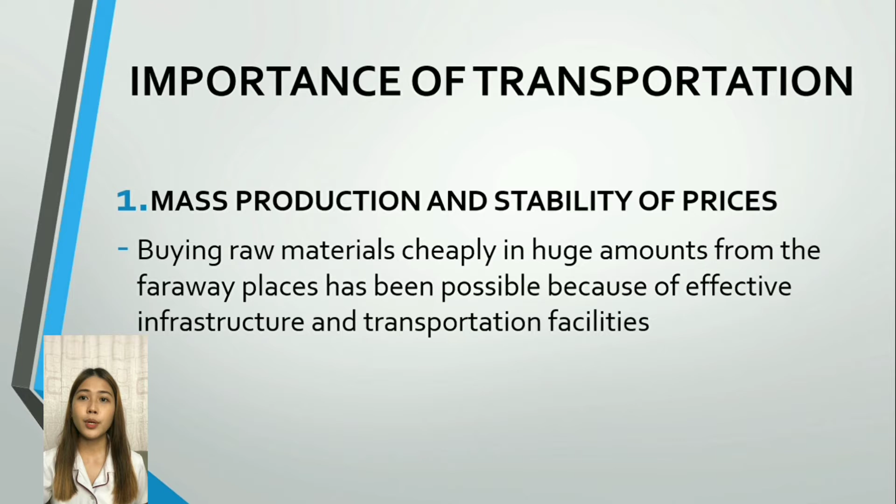Transportation has now brought about uniformity in price ranges by equalizing and stabilizing it throughout the nation. This move has been a blessing in disguise because it has encouraged healthy competition and discouraged the policy of monopoly of goods. Number two is the economic development.

Trade is no longer restricted within certain boundaries but has spread far and wide within every nook and corner of the world. It is the advancement of transportation that has acted as a binding force to link the world market. The importance of transportation is that it has become a major force in boosting the mobility of capital and labor. Now, it is possible for laborers to migrate to places where the job, facilities, and opportunities to earn are greater than local places.

Economic development has been possible because efficient transportation infrastructure has been able to minimize the exploitation of the labor class and maximize the optimization of national resources. It is now possible for a region to concentrate on production of goods that it is best suited for and distribute them to places where the demand is more.

Also, the importance of transportation is that it has become a crucial element of economic growth as it can transport resources easily, enabling societies to prosper and grow at a good rate. There is now better accessibility to invest for new as well as existing business entities. It is easy to see the emergence of markets, schools, colleges, and other facilities that have been a sign of increase of economic growth in a place.

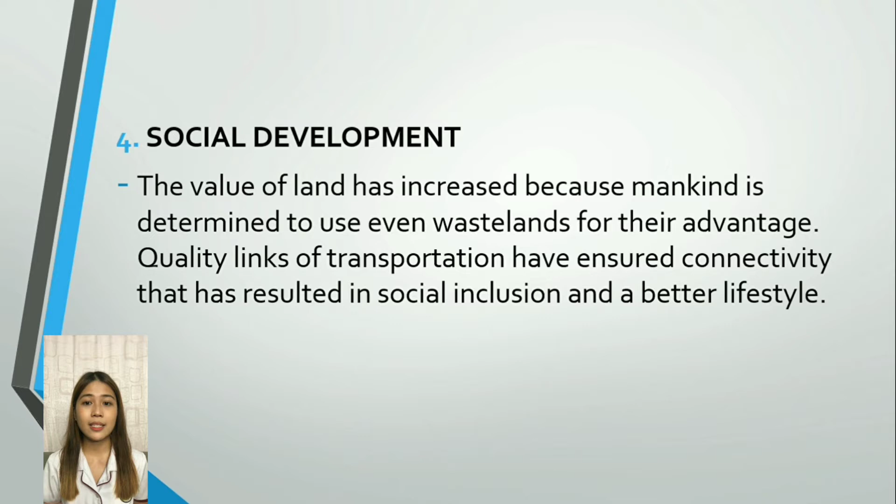And number 5, we have industrial and agricultural development. In this area, it has been possible to use good fertilizers, quality seeds, and numerous modern equipment and technologies because they could be transported from one place to another at reasonable cost. Similarly, it is transportation that helped the industries in acquiring the necessary raw materials as well as equipment and labor that is a must in industrial development.

Remember, encouraging trade, industry, commerce, and agriculture is one of the simplest and most economical ways of boosting the national wealth of the country.

Also, this is a help during national calamities. The transportation is very important during these times. Floods, drought, earthquakes, and famine are natural disasters that are unpredictable by nature. It is next to impossible to make predictions about their arrival, length, or severity. One can just wait for the time it loses its fury and dies a natural death.

So the worst thing about such disasters is that they can leave behind immense destruction that is immeasurable. Lost lives, resources, and infrastructures are common after effects that people have to deal with. In such dire circumstances, it is transportation that acts as a blessing in disguise and manages to distribute survival kits and emergency food items immediately afterward.

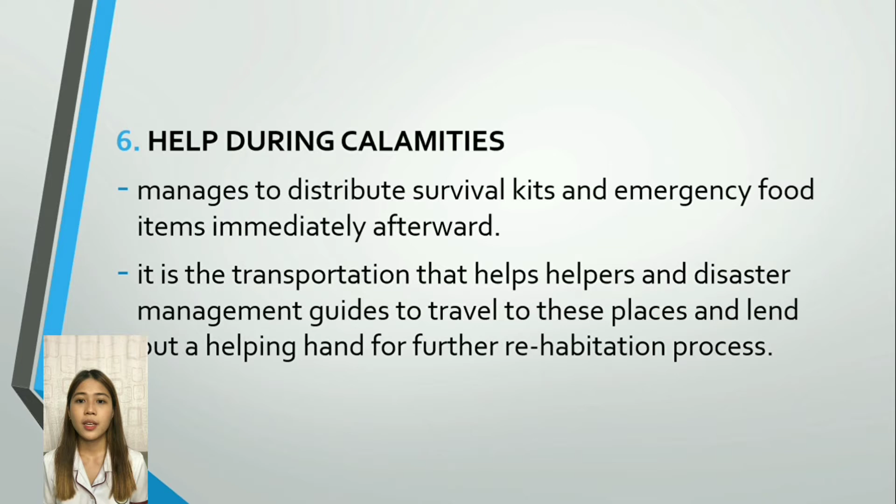And lastly, we have growth in business. So, transportation is considered a major force that has contributed heavily to the growth of business organizations. It is a medium that physically connects a business entity to its customers as well as suppliers.

The importance of transportation in business is undoubtedly immense, from bringing raw materials from source stations to manufacturing facilities and later distributing the finished goods from the locations to the consumer markets via warehouses. It is an essential service that would not have been possible without transportation. So it is transportation that ensures the availability of goods and services to the consumer.

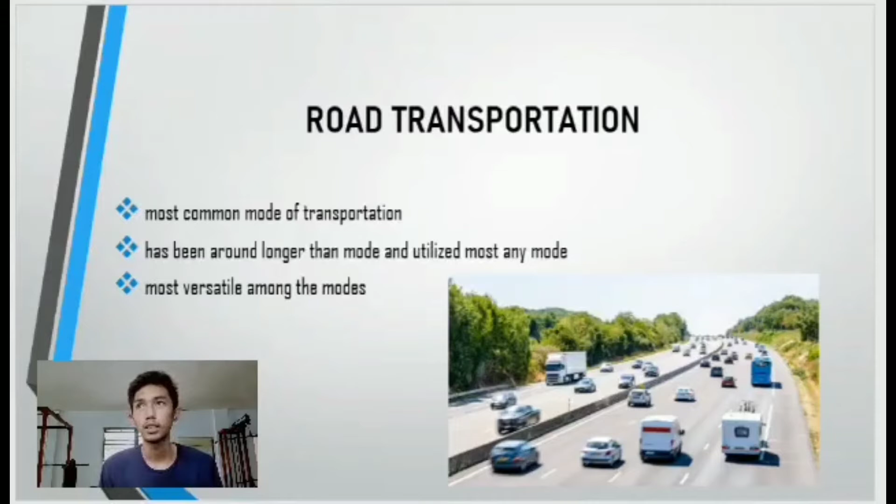Hi classmates, my name is Lian Doctor and my topic is about different modes of transportation. First is road transportation. It is the most common mode of transportation and has been around longer. It is also the most versatile among the modes. There are two types of road transportation, which are less than truckload or LTL and truckload TL.

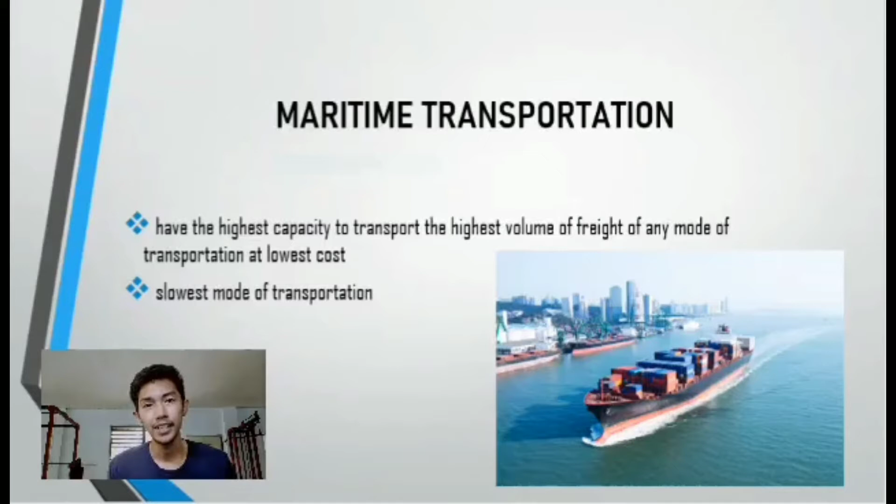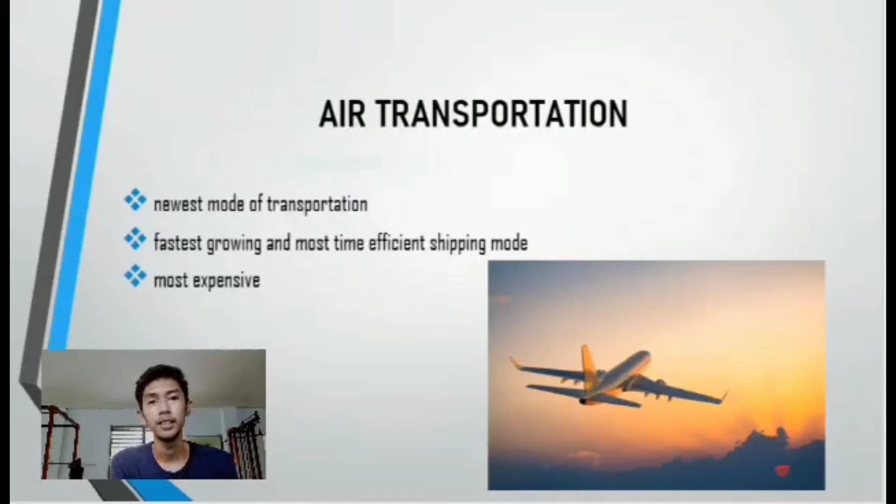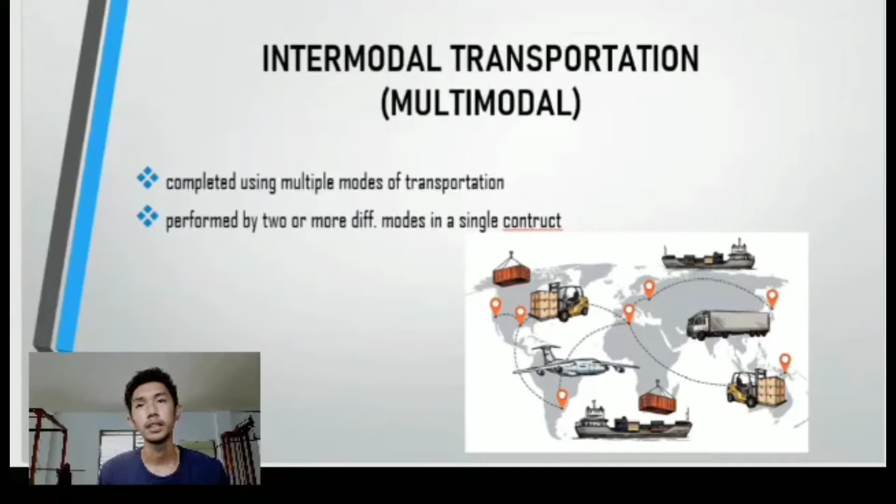And last is the pipeline transportation. It can be built above the ground or underwater.

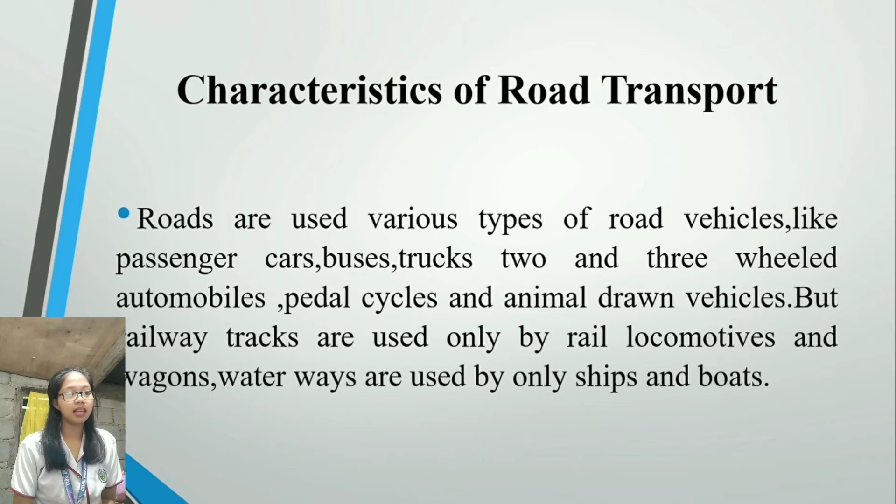Road transport requires a relatively small investment from the government. Motor vehicles are much cheaper than carriers like rail locomotives and wagons, water and air carriers. Construction and maintenance of roads is also cheaper than of railway tracks, docks,

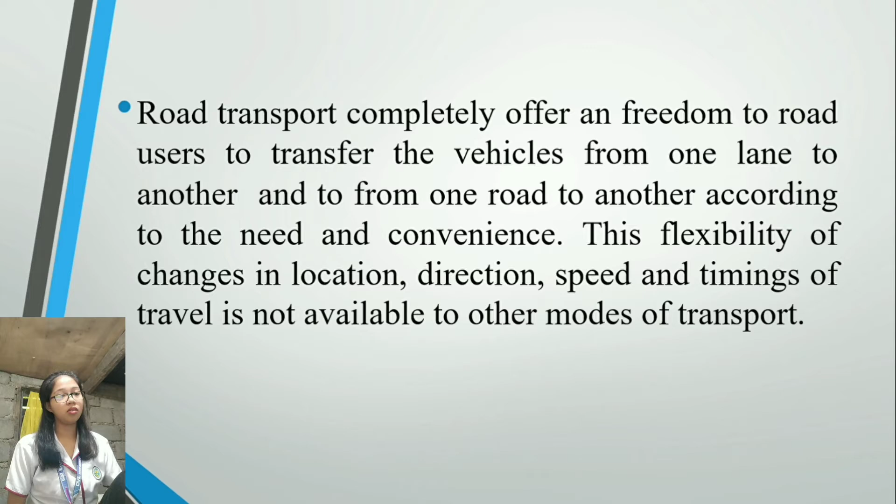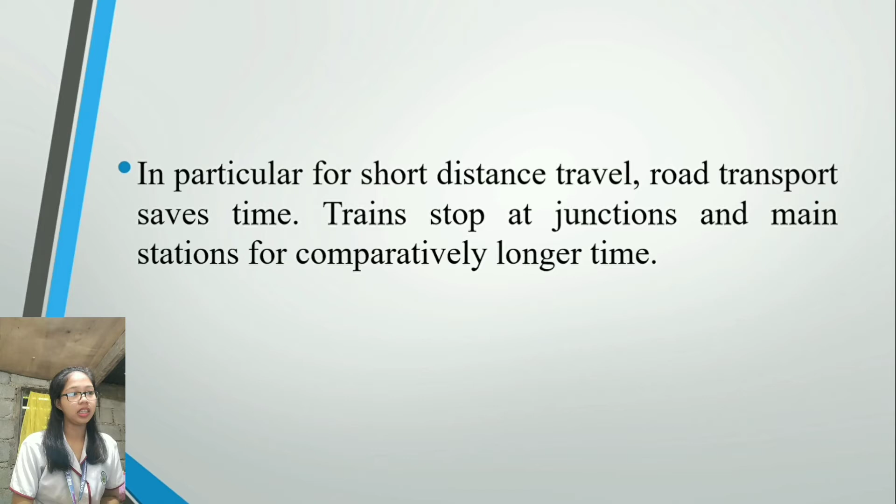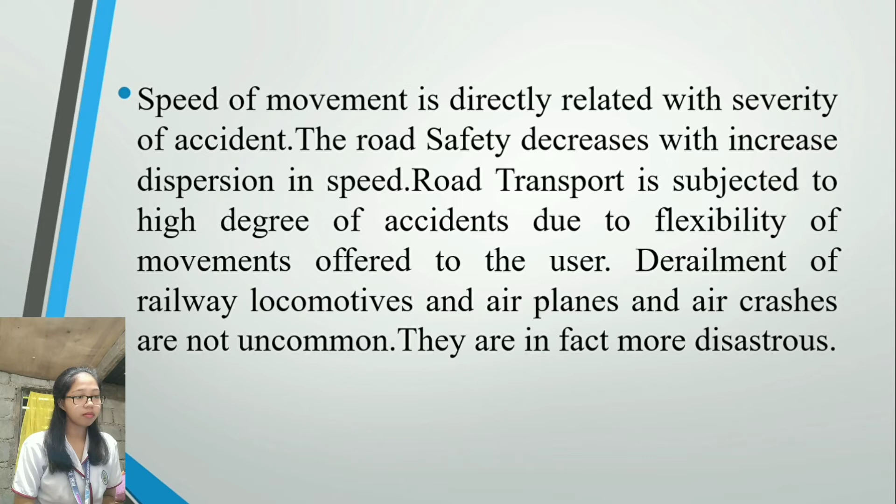Speed of movement is directly related with severity of accident. The road safety decreases with increased dispersion in speed. Road transport is subjected to high degree of accident due to flexibility of movements offered to the user. Derailment of railways, locomotive, and airplane and air crashes are not uncommon. They are in fact more disastrous. Road transport is the only means of transport that offers itself to the whole community.

Hi everyone, I am Syra Discaya, and I will be discussing to you the scope of traffic engineering. So let us first define what traffic engineering is. According to the Institute of Traffic Engineers, USA, traffic engineering is the phase of engineering that deals with planning and geometric design of streets, highways, abutting lands, and with traffic operations thereon, as their use is related to the safe, convenient, and economic transportation of persons and goods.

Professor Ress Blundeu of California University proposed a modified definition, that is, traffic engineering being the science of measuring traffic and travel, the study of the basic laws relating to the traffic flow and generation, and application of this knowledge to the professional practice of planning, designing, and operating traffic systems to achieve safe and efficient movement of persons and goods.

So generally, traffic engineering is the branch of engineering that deals with the improvement of traffic performance on road network and terminals through systematic traffic studies, scientific analysis, and engineering applications. It is the branch of civil engineering that deals with the application of scientific principles, tools, techniques, and findings for safe, rapid, convenient, economic movement of people and goods.

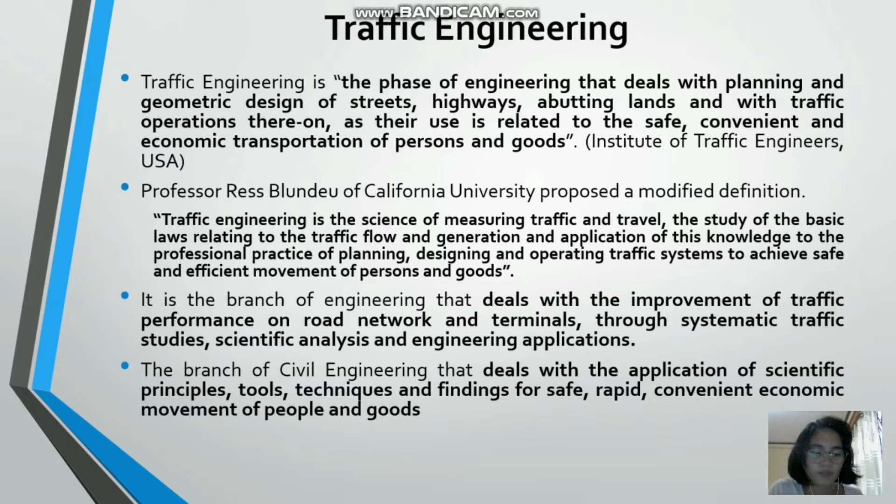So traffic engineering has 9 objectives. First is to achieve smooth and easy flow of traffic at intersections, develop the methods for improvements in general and solving specific problems in particular, having safe, convenient, comfortable, rapid, and economic transport of goods and persons, improve the speeds of vehicles, increase the traffic capacity of roads, make the streets safe for movements of both pedestrians and vehicles, reduce road accidents to minimum, reduce the delays in road journeys, and remove the traffic congestions, etc.

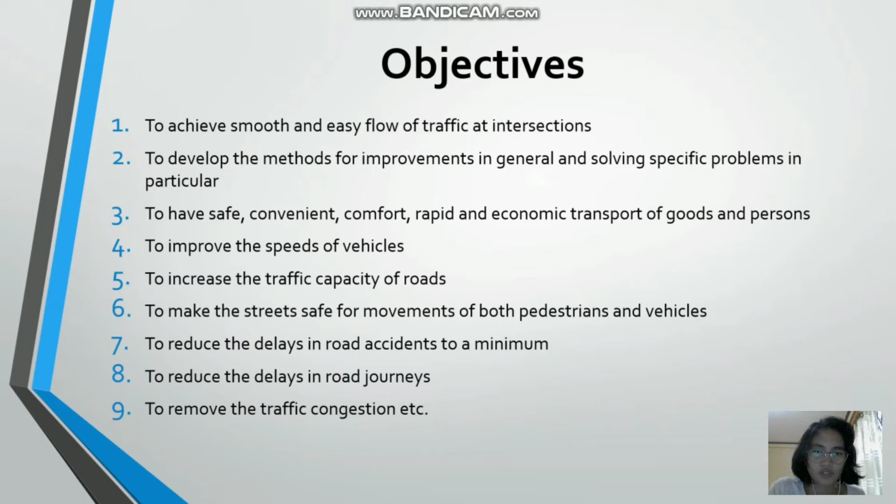So let us now come to the scope of traffic engineering. The factual studies of traffic operations will provide the foundation of developing methods and for solving specific problems. The study of traffic engineering includes the traffic characteristics, traffic studies and analysis, traffic operation control and regulation, planning and analysis, geometric design, and administration and management.

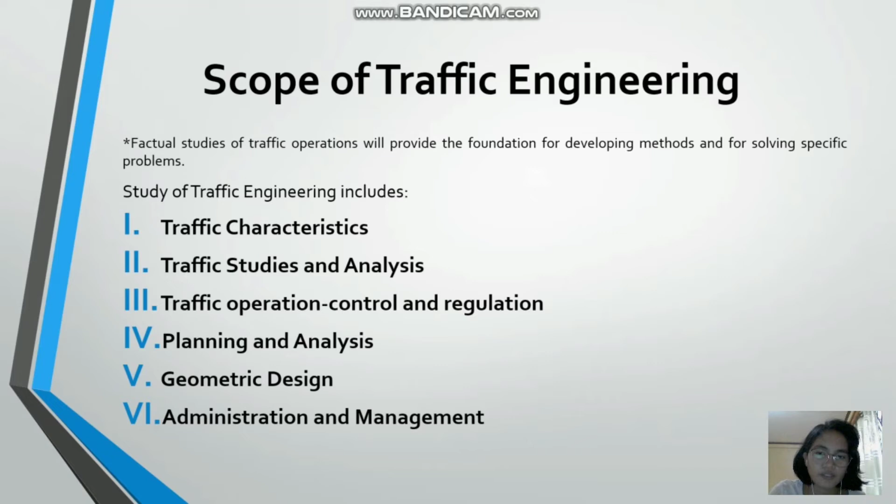So, traffic characteristics is basically the characteristics of the elements of traffic system. The traffic characteristics study is very vital for designing the required geometric features in the roadway. So there are 2 types of traffic characteristics. The road user characteristics, which includes the drivers, pedestrians, bicyclists, and passengers. So basically, it pertains to the person or the people that use the road. So there are 4 aspects of road user characteristics.

First is the physical, which is measurable and quantifiable. There are 2 types of physical characteristics, the permanent and the temporary. Permanent includes the vision, hearing, and reaction time of the road user. And the temporary is the presence of fatigue, influence of alcohol, illness, and drugs. Next is the mental characteristic. This includes the knowledge, skill, experience, intelligence, and literacy of the road user.

Next is the psychological, which includes the attentiveness, fear, anger, and superposition of the road user. Superposition is the desired speed and safety distance of the road user. And the last is the environmental characteristic, which includes the traffic stream, facilities, atmosphere, and locality.

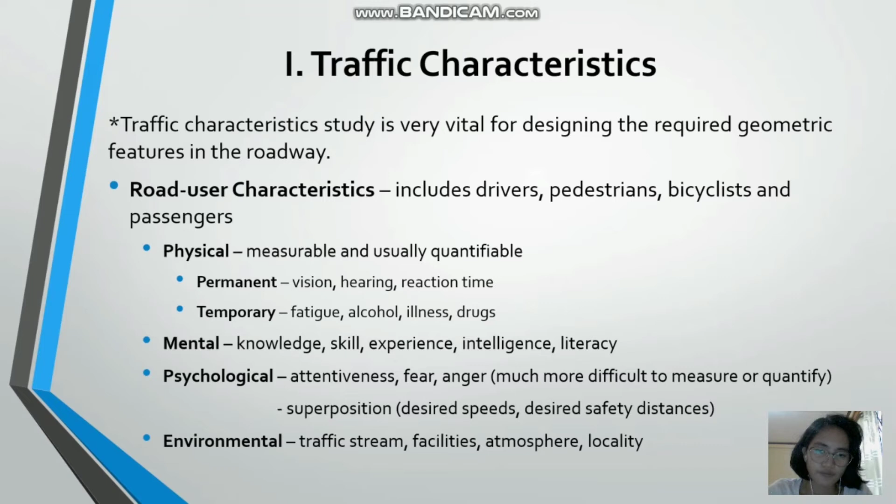The second type of traffic characteristic is the vehicular characteristic. So basically, vehicular characteristics pertain to the characteristics of the vehicle. These are the important characteristics of vehicles that affect the design and traffic performance. So there are 2 types of vehicular characteristics.

First is the static characteristics, which includes the dimensions of the vehicles, its length, width, height, wheelbase, departure and ramp angles, front, rear, and center clearances. This also includes its weight and maximum turning radius. Next is the dynamic characteristics, which is basically about the performance of the vehicle. This includes its speed, acceleration, power and braking system, and lighting system.

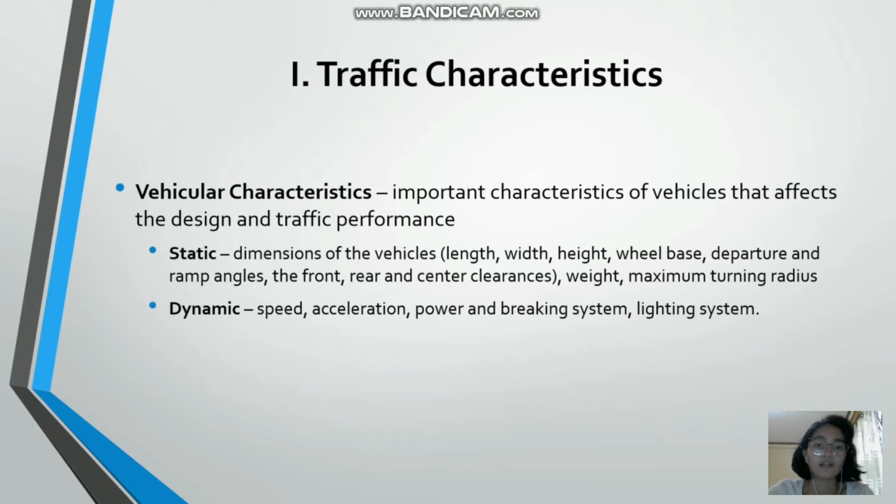The second scope is the traffic studies and analysis. These are also called traffic censuses or surveys. This involves the analysis of traffic characteristics for road designs, for safe and efficient movement of traffic, and traffic control. The studies include traffic volume study, speed studies, origin and destination study, traffic flow characteristics, traffic capacity study, parking

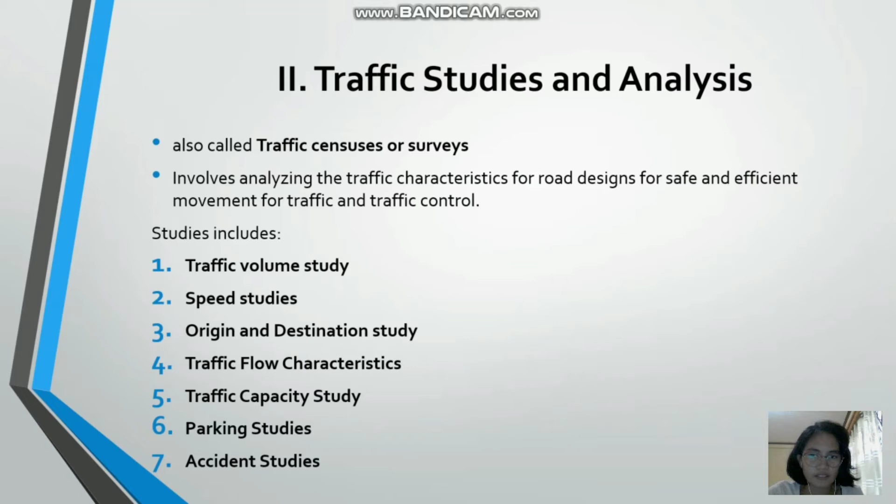studies, and accident study. Traffic volume study is the number of vehicles crossing a section of road per unit time at any selected area. These are used for road improvement and expansion, traffic operation and control, structural design of pavements, geometric design, planning and designing new facilities, etc. Traffic volume counting can be done through two methods: mechanical counting, which makes use of mechanical counters, and manual counting, which is through manual counts.

The second is the speed studies. This can be studied under the following heads: travel time, which is a simple measure of how well the road network is operating; spot speed, the instantaneous speed of a vehicle at a specified section or location; average speed, the average of the spot speeds of all passing vehicles at a given point on the highway; running speed, the average speed maintained by a vehicle over a particular stretch of road while the vehicle is in motion; and overall travel speed, the effective speed with which a vehicle traverses a particular route between two terminals.

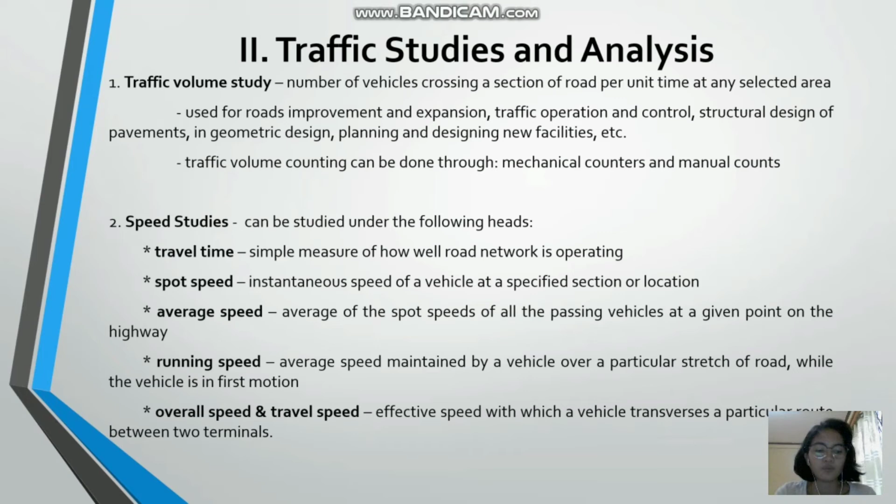Next is the origin and destination studies. These are used to plan the road network and other vehicular facilities for the traffic, and plan the schedule of different modes of transportation for the trip demands of commuters. Next is traffic flow characteristics, which includes both the transverse and longitudinal distribution of vehicles in the traffic stream and is useful in geometric design features such as traffic capacity, volume, number of lanes, and width of carriageways. Another is traffic capacity studies, the study of the ability of the road to accommodate traffic volume, expressed as the maximum number of vehicles in a lane or road that can pass in unit time.

Next is parking studies, which is useful in evaluating the facilities available for parking. And the last is accident studies, used to study the causes of accidents and suggest corrective treatment at potential locations, evaluating the existing and supporting the proposed design. Studies are carried out before and after improvement, making computations and giving economic justifications for the improvements suggested by traffic engineers.

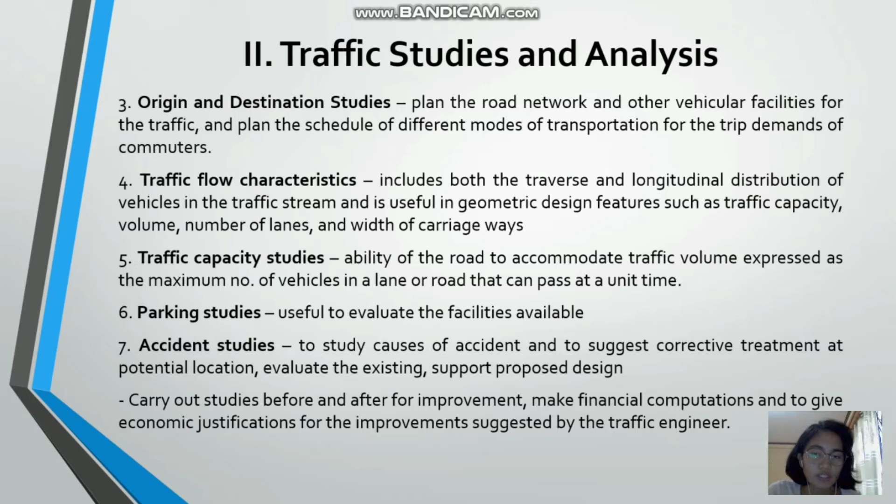The third scope is traffic operation, control, and regulation. This is done through the use of traffic controlling devices. These are arrangements or provisions made for road users so as to avoid accidents on the roads and for free and effective traffic flow.

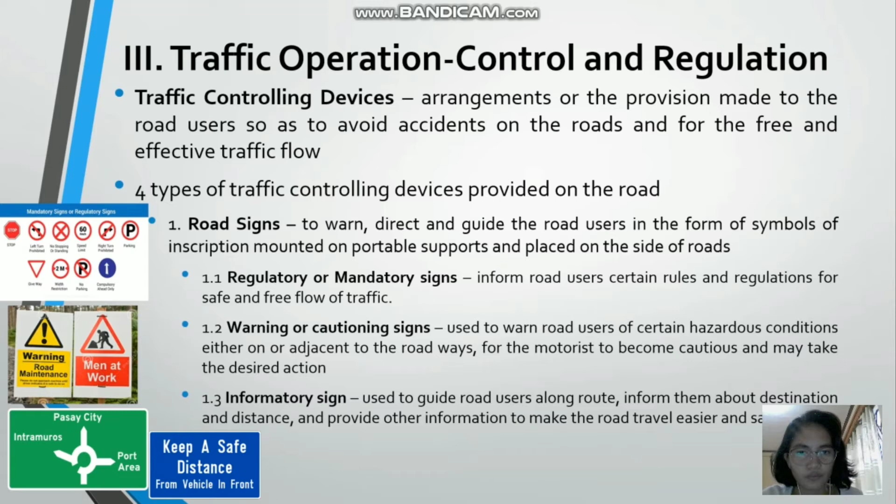Next type of traffic control devices is the markings. These are lines, patterns, words, symbols, or reflectors applied to the carriageway, curbs, sides of islands, or to fixed objects near the roadway. Ito yung mga yellow, orange, white, and minsan black lines, patterns, and words na nakikita natin sa road. Included din pala dito yung color green na lights na nandun mismo sa road. Yun yung tinatawag na reflectors. So those are the examples of markings.

This is used to warn, inform, and guide road users, and are made by using paints in contrast with colors and brightness on pavements or other backgrounds. Ordinary paints, like oil paints, are used for road markings.

The third type of traffic control device is the signals. These are control devices that could alternately direct the traffic to stop and proceed at intersections using red and green traffic light signals automatically. Ito yung mga traffic lights na nakikita natin.

There are two types of signals. One is the traffic control signals — ito yung traffic light mismo intended for the drivers. These have three colored light glows facing each direction of traffic flow. Red is for stop, green is for go, yellow or amber is for clearance time or preparation time.

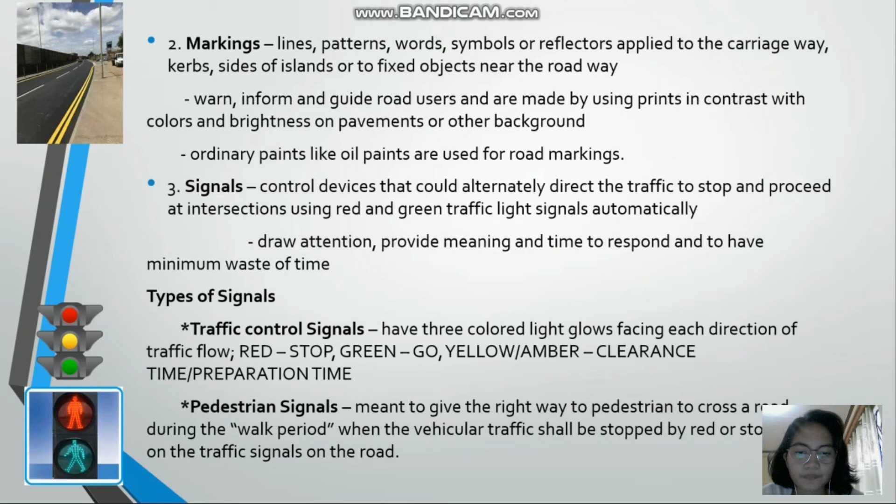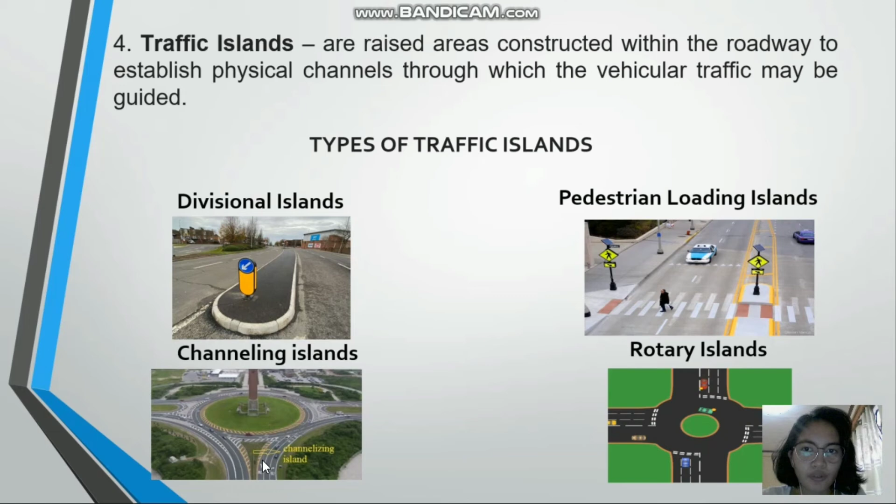Let us now come to the other scopes of traffic engineering. The fourth scope of traffic engineering is traffic planning and analysis — dito na papasok yung planning. This is done to prevent or lessen accidents and congestions.

The next is the geometric design, and dito na papasok yung designs. This refers to the dimensions and arrangements of the visible features of a roadway. This includes pavement widths, horizontal and vertical alignment, slopes, channelization, intersections, and other features that can significantly affect the operations, safety, and capacity of the road network.

And the last scope is the administration and management. Traffic management is the organization, arrangement, guidance, and control of both stationary and moving traffic, including pedestrians, bicyclists, and all types of vehicles. Its aim is to provide for safe, orderly, and efficient movement of persons and goods, and to protect and, where possible, enhance the quality of the local environment on and adjacent to traffic facilities. So those are the scopes of traffic engineering.

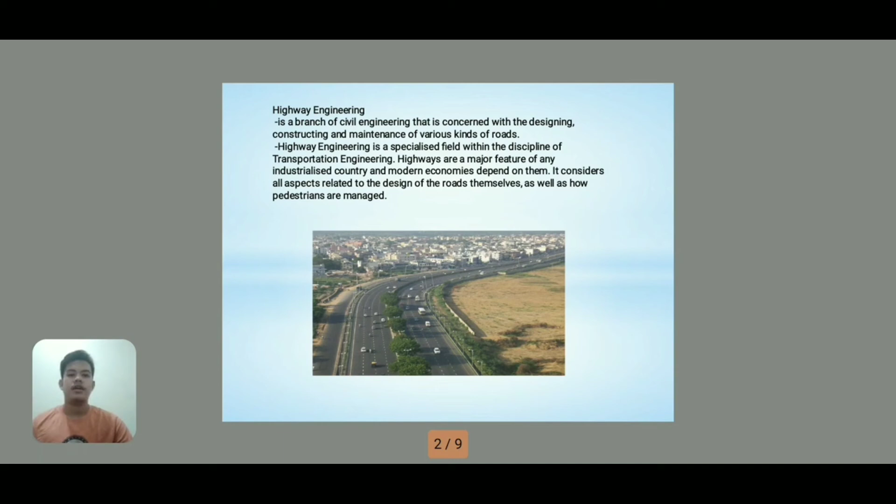It considers all aspects related to the design of the roads themselves, as well as how pedestrians are managed. Besides designing, constructing, and maintaining roads of different types, highway engineering is also concerned with the study of the planning, location, and development of roads.

A highway engineer needs to identify areas that require connectivity. He needs to come up with a plan to connect the remote areas in an efficient way. Developed roads need to be evaluated on a regular basis by such highway engineers.

For example, as you notice the Rompeolas Road, which is very effective because it helps with traffic control. As you can see, the jeepneys heading to east Sorsogon pass through here, so they avoid traffic compared to taking the main road of Sorsogon.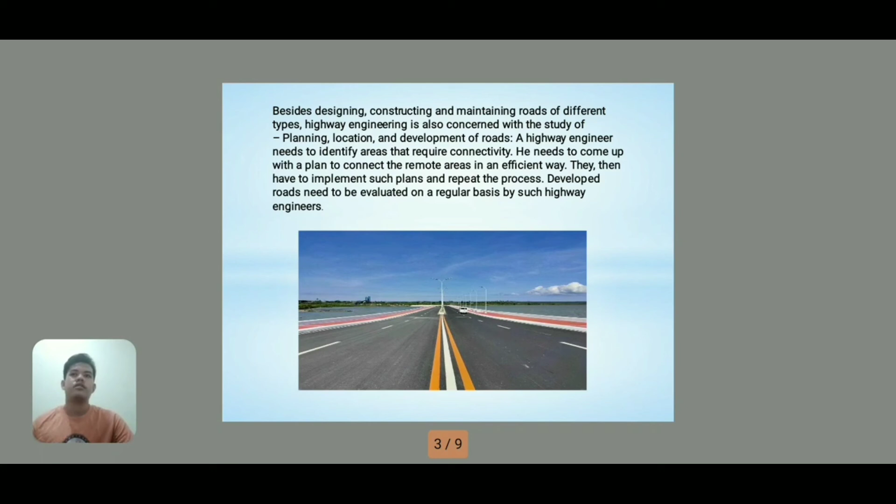So one of the scopes of highway engineering is the geometric design of a highway. It is the determination of layout and features visible on the highway, with emphasis on satisfying the needs of the driver as well as ensuring the safety of the vehicle.

It is about comfort while driving and efficiency. Other related factors are also considered based on the project. The main features considered for geometric design of a highway are the cross-section elements, the gradient, the intersection, and the consideration of sight distance, as you can see in that picture.

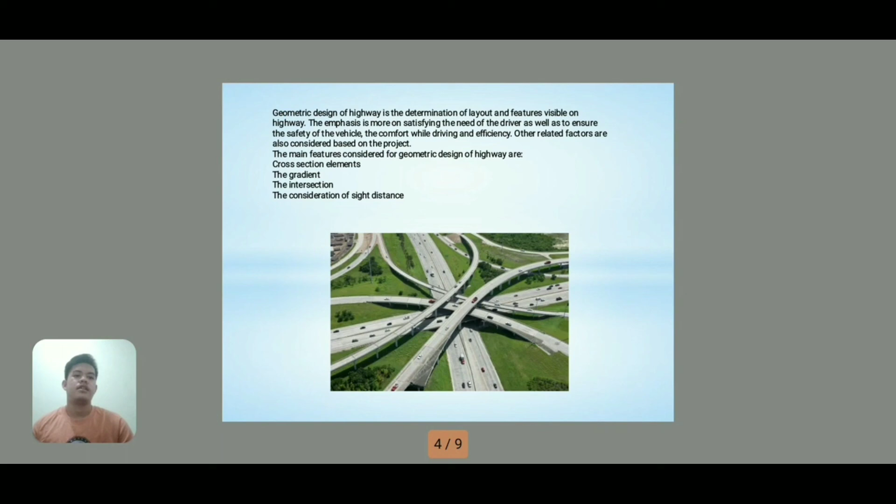Second is material availability. A highway engineer needs to ascertain the requirement of materials. Adequate materials is a must for the smooth and orderly conduct of construction activities. He also needs to avoid overstocking, as that simply increases the carrying cost.

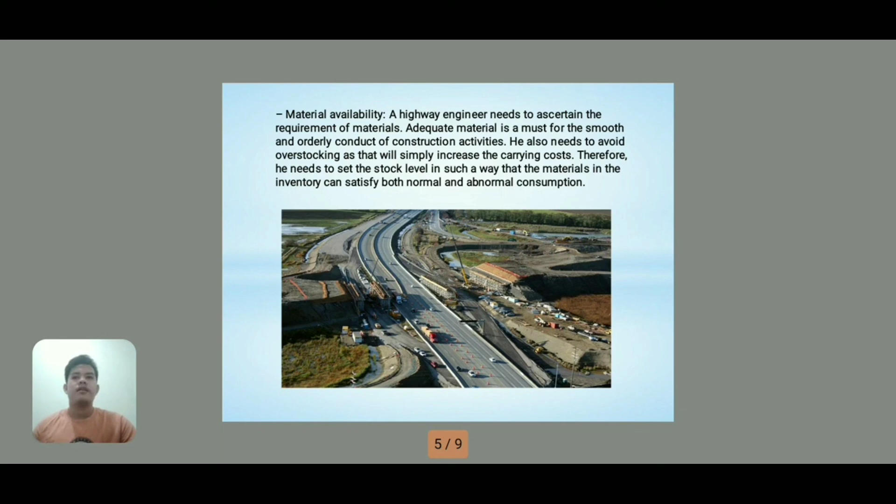So a highway engineer needs to ascertain the requirement of materials, to ensure material availability in order to avoid delays in the construction of roads.

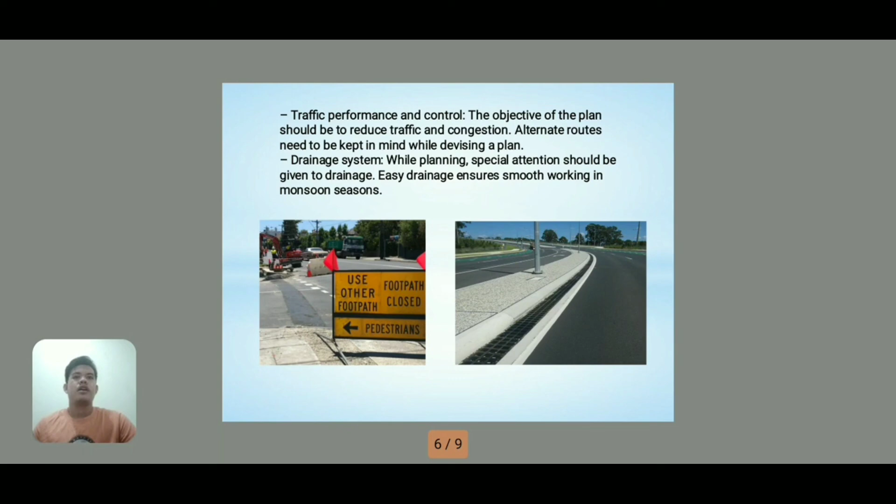The fourth is the drainage system. While planning, special attention should be given to drainage. Easy drainage ensures smooth working during monsoon seasons. Effective drainage systems for highways are very important during the rainy season.

Next is road alignment. The position of the center line on the highway on the ground is called the highway alignment. As you can see in the picture, the projection of a highway alignment in the horizontal plane is termed the horizontal alignment, and the projection in the vertical plane is called the vertical alignment. Alignment must be selected in such a way that the overall cost during construction, operation, and maintenance is minimum.

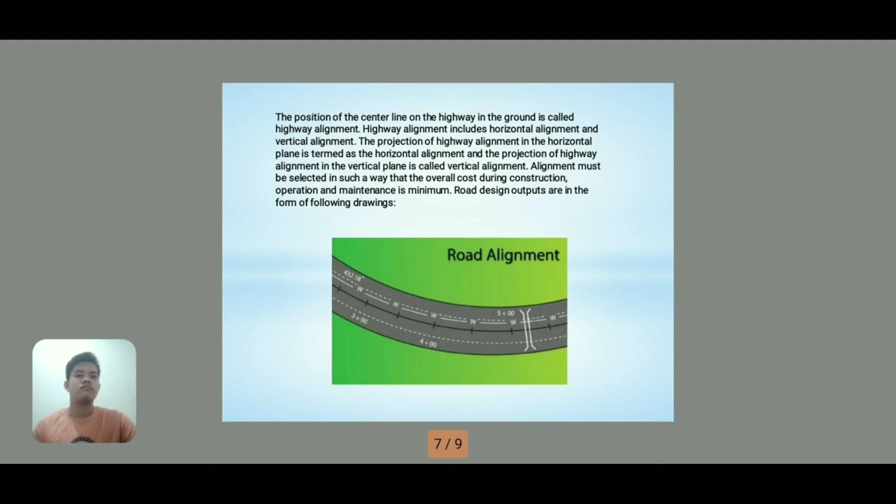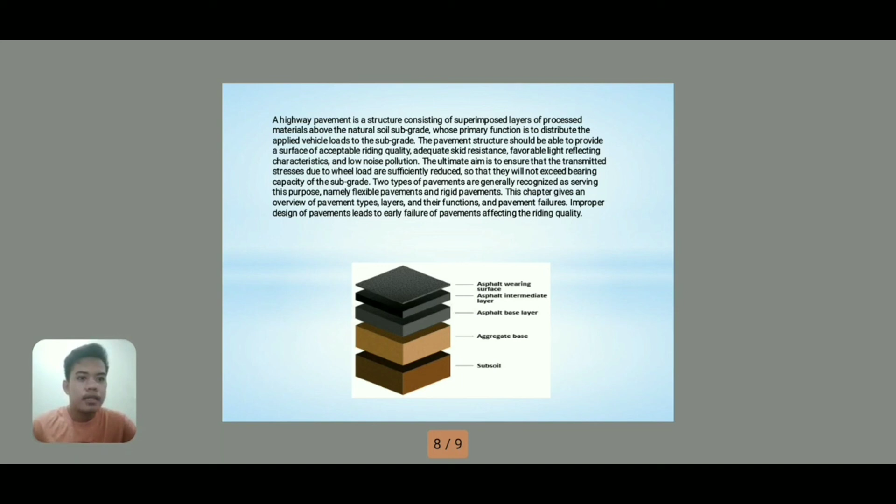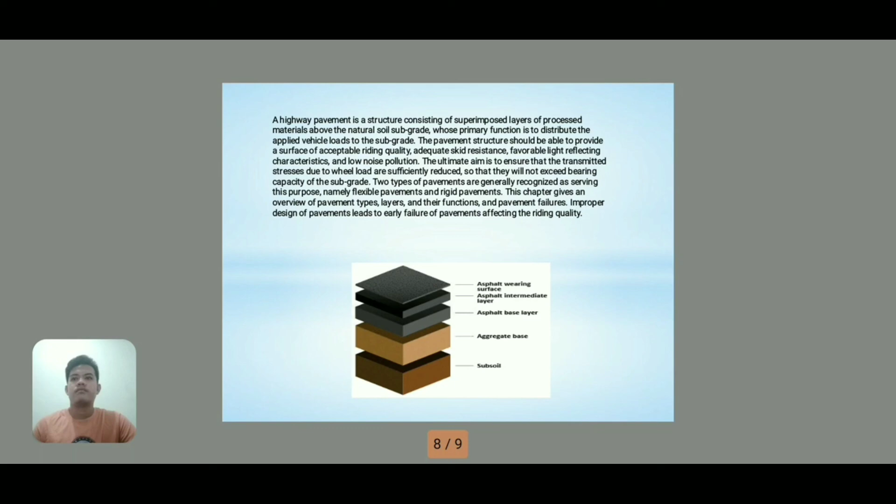The fifth is highway pavement. It is a structure consisting of superimposed layers of processed materials above the natural soil subgrade, whose primary function is to distribute the applied vehicle loads to the subgrade. As you can see in the picture, at the bottom there is the subsoil, and on top of it is the aggregate base, the asphalt base layer, the asphalt intermediate layer, and the asphalt wearing surface. This highway pavement remains effective through the years.

Lastly, the construction and maintenance of highways. It is assumed by either the state or local communities, specifically designated agencies. The actual plan of work in constructing, maintaining, or repairing highways is at the discretion of the highway authorities, whereas the state legislature determines their roads. The authorities make provisions for the drainage of surface waters and for the building of ditches and culverts.

So the roads become more effective for use because of proper construction and maintenance. This planning makes the construction of roads and highways easier, specifically the construction of drainage systems, ditches, and culverts. So that's it, thank you.